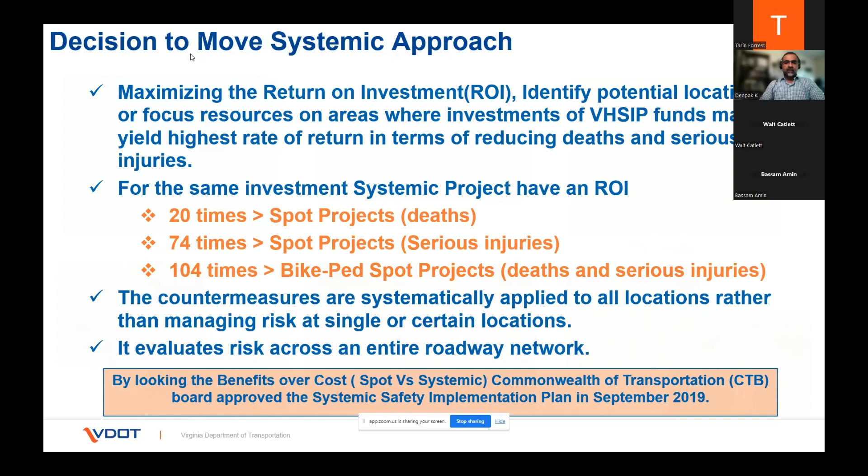The slides talk about local systemic initiative countermeasure identification, how we developed the systemic criteria for this round. The process for identifying systemic initiatives begins with our Strategic Highway Safety Plan, that is the Virginia SHSP.

That is the statewide coordination between safety planners and providers, a comprehensive framework for reducing fatalities and serious injuries on all public roads. The SHSP is developed in coordination with transportation and safety stakeholders and is updated every 5 years. The current plan extends from 2022 to 2026 and includes various emphasis areas to address traffic safety.

The emphasis areas relate to infrastructure-related improvement and behavioral-related focus on safe system elements. The emphasis areas included in the SHSP are roadway departure, speeding, intersection related, pedestrian, bicycle, impaired driving, occupant protection, young drivers, senior drivers, and we also use a data-driven approach.

The second step is after identifying the safe system element and emphasis area, we compile systemic countermeasures to address the emphasis area in the SHSP. Systemic countermeasures are low-cost measures with proven safety benefits that can be implemented at locations with the associated crash type. These were identified using crash modification factors from the clearinghouse, VDOT's Virginia-specific preferred crash modification list, Federal Highway's proven safety countermeasures, Virginia Transportation Research Council studies, NCHRP reports, etc. From there, we conducted a benefit cost analysis to determine which measures would provide the greatest safety benefit for the investment.

Hey Deepak. Yes, okay perfect, you're good. Okay, your slide was looking funky but it looks great now, so I'll be quiet. Keep rocking and rolling. Sorry about that, okay.

After the determination of systemic initiatives, this slide shows the VDOT preferred systemic initiatives. These are the ones we're focused on. But if localities have some initiatives they want to include, they must make the case and prove the selected countermeasures have the highest return on investment. However, priority will be given to these 6 identified initiatives, and ultimately these 6 countermeasures are the ones we have ready to provide funds for localities.

And these are all FHWA proven countermeasures. The implementation criteria and one-pagers have been developed, so those are all available on our external website. Please go and follow the criteria before preparing the application.

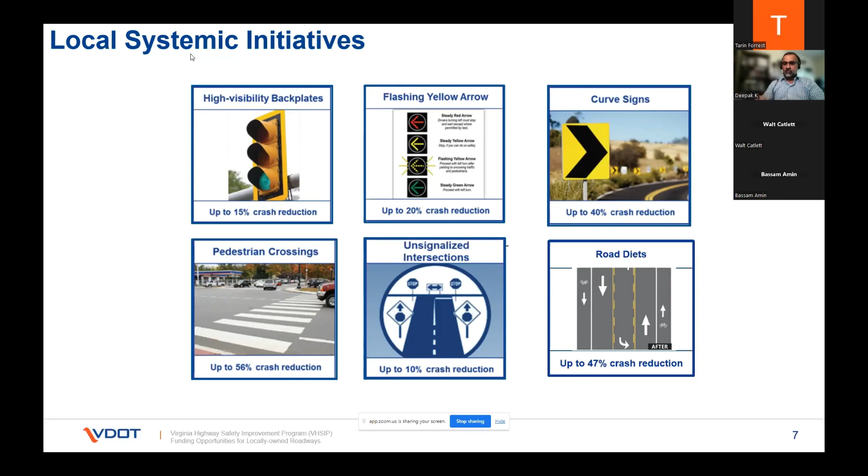These slides talk about the funding availability for localities. The Commonwealth Transportation Board approved the updated systemic plan in January 2022 and set aside approximately 110 million for localities. Last round, we funded all the local safety projects submitted, worth around 60 million on locally maintained roads. The leftover fund, approximately 50 million, is available for this round, and it's focused on the 6 identified initiatives: high visibility backplates, flashing yellow arrow, pedestrian crossing, road diet, unsignalized intersection, and curve delineation.

The one-pagers and implementation criteria have been developed, so please go to the external VDOT website to look at those before preparing applications.

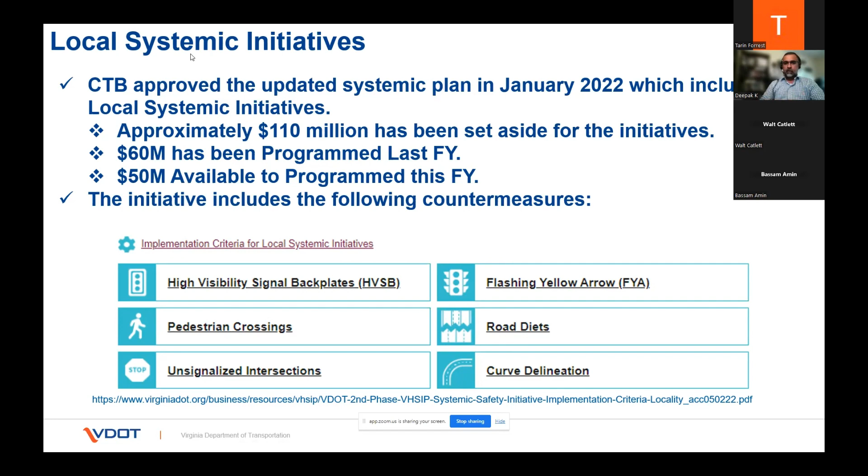For this round, the funding is only available for systemic initiatives on locally maintained roads. Let me tell you a fact about Virginia: VDOT ranked 3rd in the country for state maintained highway miles after Texas and North Carolina. That's roughly 58,000 centerline miles VDOT maintains, and roughly 11,000 centerline miles of urban streets maintained by cities and towns. Just to remind you, the funding is only available for locally maintained roads for this round.

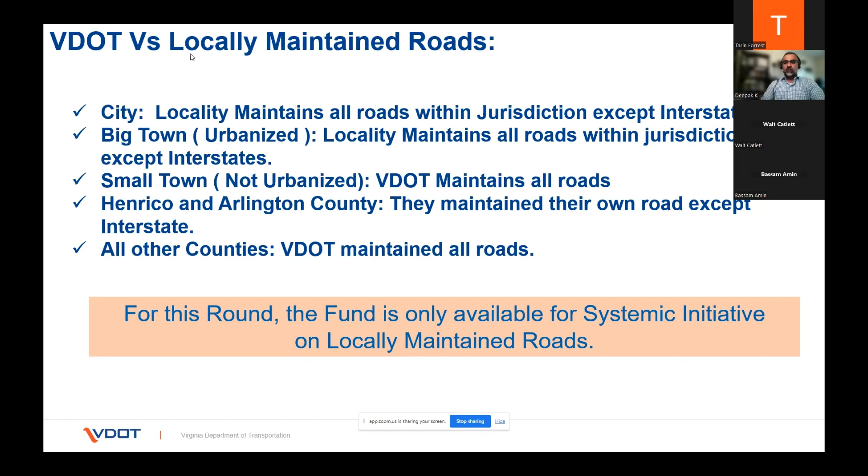I'm not going to spend a lot of time on these initiatives, I'll just go through them in summary. High visibility backplates is one of the countermeasures proven as a low-cost safety countermeasure by Federal Highway that can be deployed systematically. The budget estimate is 5,000 to 15,000 per intersection. The service life, meaning the physical life of the high visibility backplates, is around 6 years. VDOT has developed tools to calculate service life, which we'll share in the near future through roundtables or similar to show how to calculate service lives for each initiative.

Basically, all traffic signals are eligible to get the HVSB with some restrictions, which include pole upgrades, signal structure replacement, or major signal modifications being restricted for this round. The HVSB has a high crash reduction, up to 15%, which is about 0.85. So after implementing HVSB, you're expected to reduce crashes by 15%.

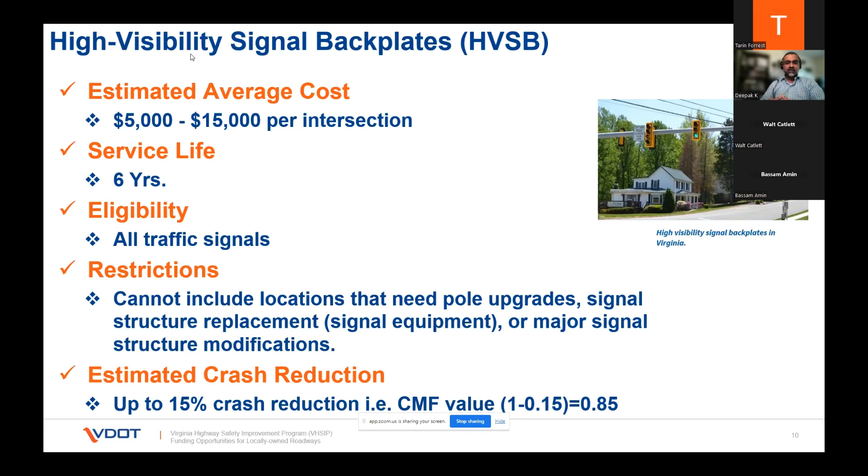Similarly, the flashing yellow arrow is another proven safety countermeasure by Federal Highway. The budget estimate is 50,000 to 125,000 per intersection, and the service life is around 10 years.

Not all traffic signals are eligible to get the flashing yellow arrow. Eligible flashing yellow arrow installation includes retrofit of existing permissive left turn phasing or protected permissive left turn phasing only. The restriction applied here is if we have major signal structure modification, such as full signal rebuild, we are not expecting those kinds of improvements for flashing yellow arrow.

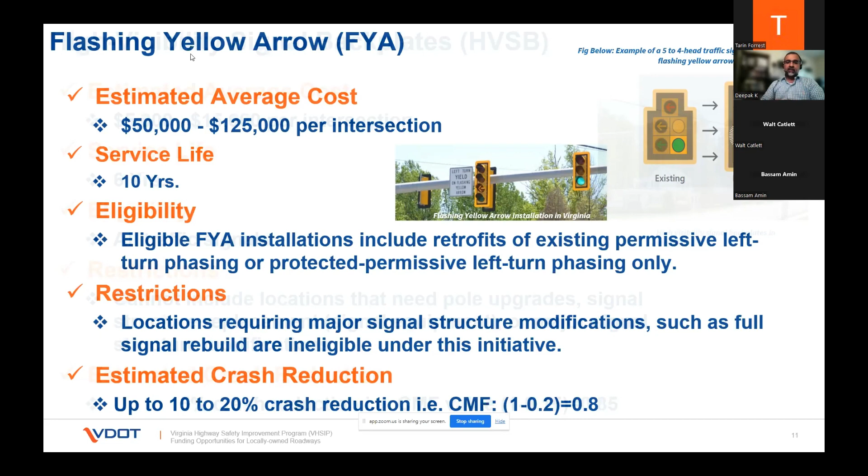The estimated crash reduction is 10 to 20%. So after implementing flashing yellow arrow, we are expected to reduce 20% of the crash.

Similarly, the pedestrian crossing is another low-cost proven safety countermeasure by Federal Highway that can be deployed systematically. The budget estimate is 50,000 to 125,000 per crossing location. The service life is around 5 years, and it includes a variety of low-cost treatments for signalized, unsignalized, and mid-block locations. We are not expecting from localities extensive sidewalk connections, road widenings, utilities relocations, curb gutter improvements. Those kinds of costs are restricted. The estimated crash reduction is 56%, so after implementing the high visibility crosswalk, we are expecting to reduce 56% of crash.

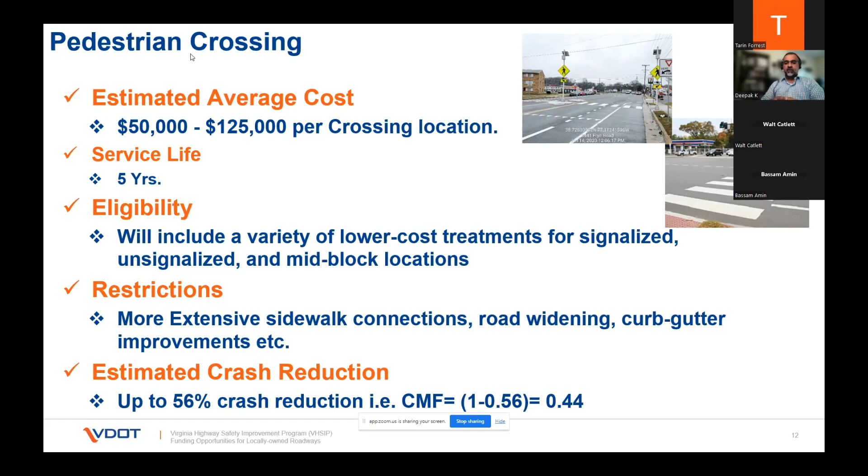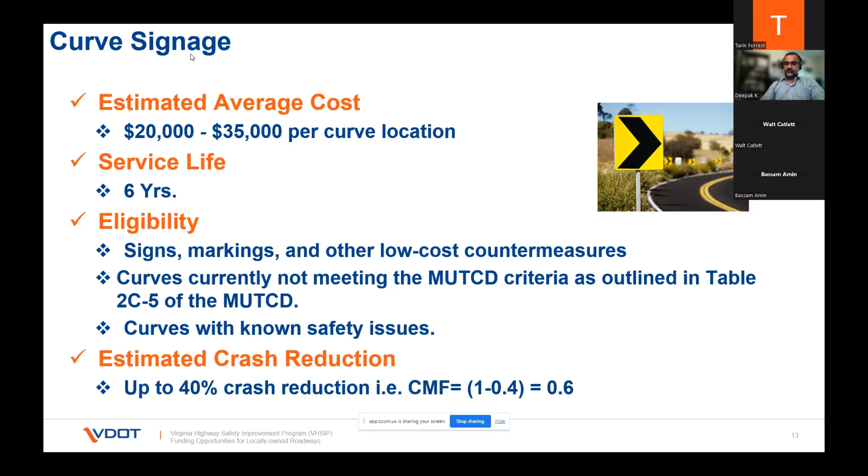Similarly, the unsignalized intersections is another low-cost proven safety countermeasure by Federal Highway. The budget estimated on average is 6,000 to 37,000 per location. The service life is around 5 years. The eligible criteria is signs, markings, and other low-cost countermeasures. Basically, the VTRC has published a report on unsignalized intersections with tier 1, tier 2, tier 3. If you are interested, you can go there. Those are all qualified low-cost countermeasures, and all those items are eligible for the unsignalized intersections. The estimated crash reduction is 10%, so after implementing unsignalized intersection related countermeasures, we are expecting to reduce around 10% of crash.

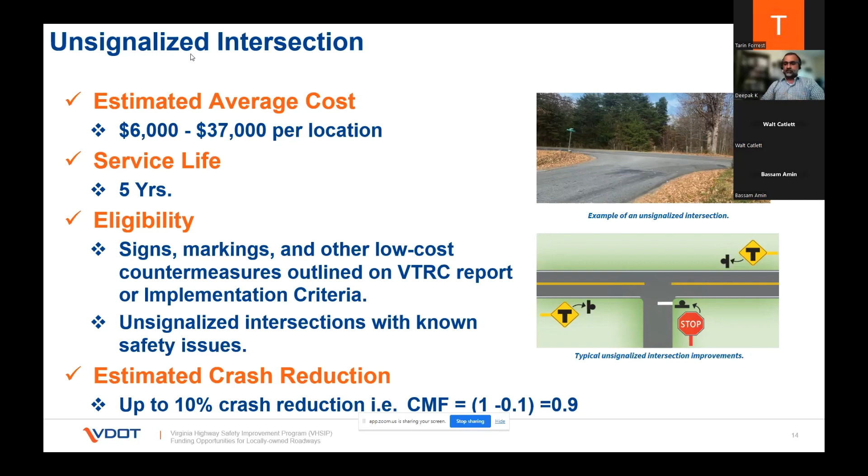The other one is road reconfiguration, or we can call it road diet. This is also a proven safety countermeasure by Federal Highway that can be deployed systematically. The road diet typically involves converting an existing 4-lane undivided roadway to a 3-lane roadway consisting of 2 through lanes and a center two-way left turn lane. Typically, for roadway with ADT less than 20,000, we recommend that. The budget estimated is around 50,000 to 100,000 per mile. The service life is around 6 years.

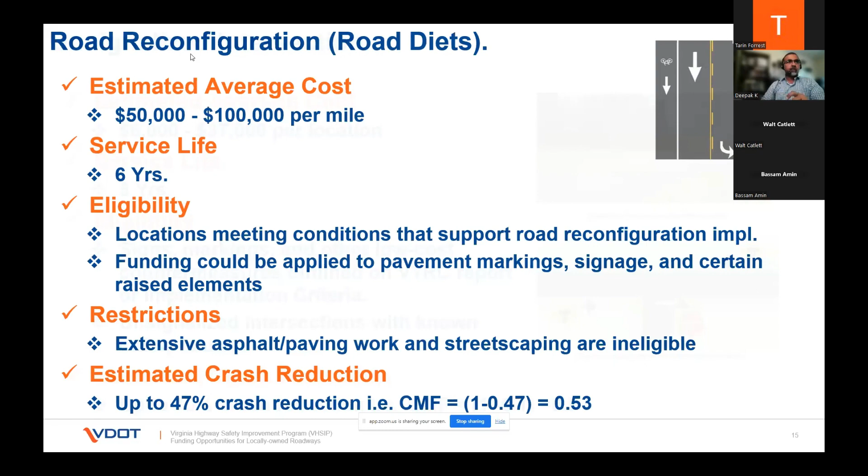We recommend to reduce the low cost. We recommend localities to follow the paving schedule and to reconfigure, to apply the road reconfiguration, so that you will save a lot of money when you are doing it with the 3R or paving schedule planned. The extensive asphalt paving work and streetscaping and adding additional lanes are not eligible for road diet. The estimated crash reduction is around 47% after implementing the road diet.

Technical assistance is available through VDOT Central Office Traffic Operation Division. However, the assistance for this period has been closed. Localities seeking assistance with this year's applications process will be contacted by the safety circuit rider team or one of our on-call consultants, BSP, Kimley-Horn, or WSP, to determine the level of support and help prepare the applications and engineering support. The engineering technical assistance includes countermeasures and site identification, application development, high-level cost estimate development, and developing scope for funding applications. Assistance not offered is the detailed design and administering the projects. So if you have any questions on this, you can contact any of us at HSIP program at vdot.virginia.gov, and we'll be reaching back to you all.

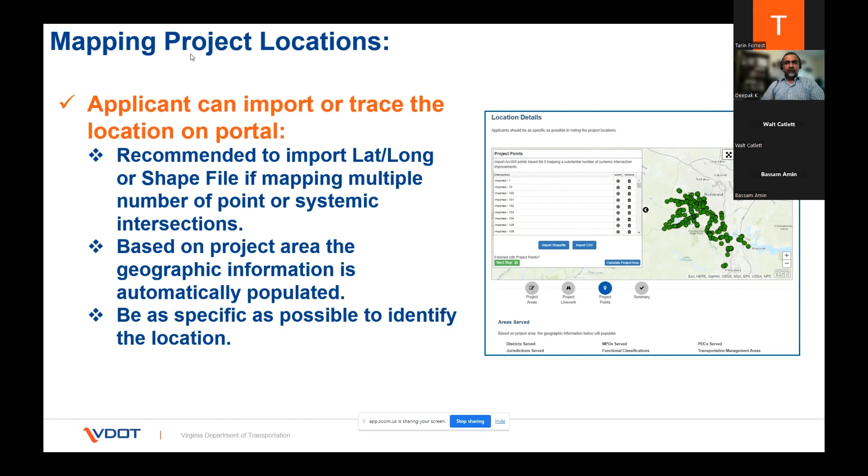The location factor, as I showed you previously, if localities map the locations properly, we'll give them the full score.

If applications use the VDOT identified scope, like the six systemic initiative, we will give them the full score because localities do not need to enter the crash modification factors or service life. Those are all embedded in the portal, so it's very easy to follow, if district localities decide to pick the VDOT identified countermeasures.

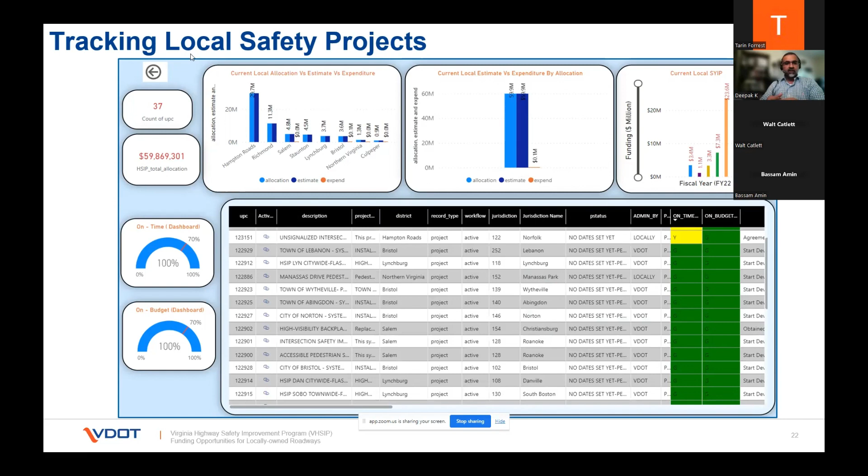This concludes my part of the sections. We have an external website with all the implementation criteria, webinars, and everything there, so we recommend you go to the external VDOT website and check those out. We also have an email sign-up. We offer periodic trainings, guidance, and updates, so if you sign up on the VDOT external website, you'll get all those notifications.

So if you have any questions, our VHSIP program manager Tracy Turpin, or you can contact me. We are here to help.

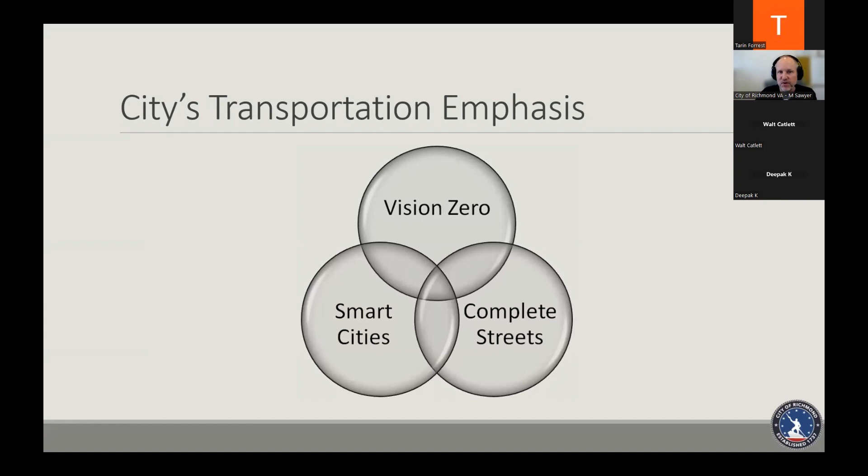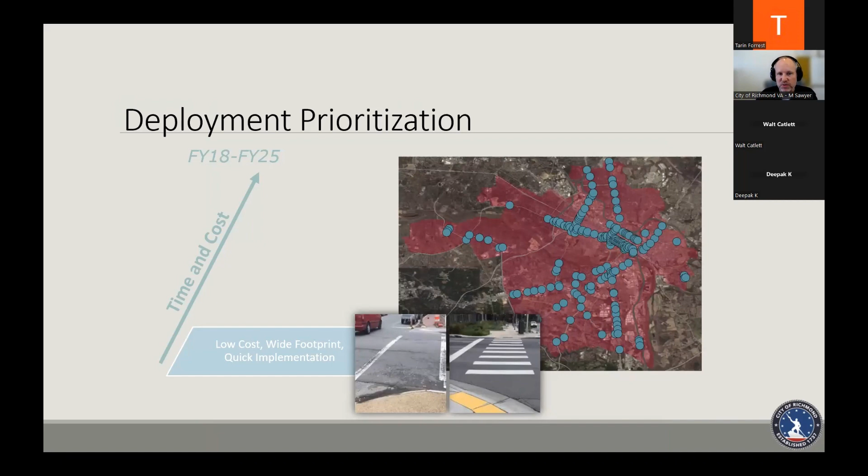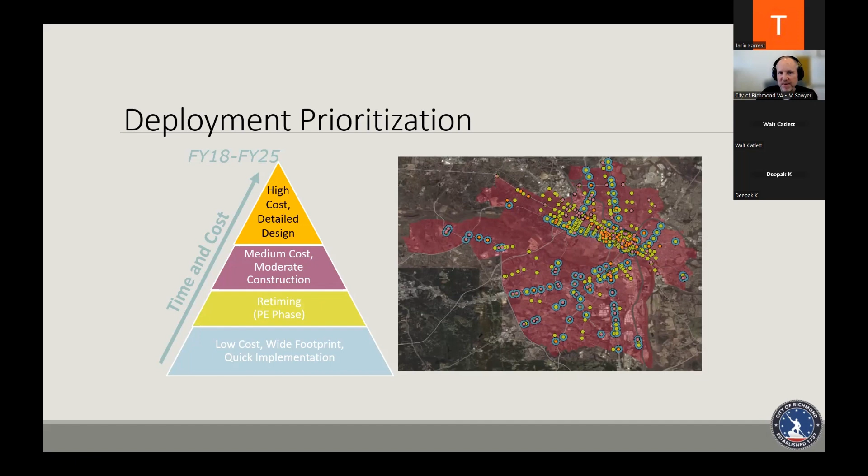When you think about prioritization, you want to go the systemic approach, which is low cost, wide footprint, quick implementation. Then you go and maybe have some retiming funding that you can throw in there to help all modes get across the street, particularly people walking. Then you have medium cost, moderate construction, and then high cost. So when deploying things in your communities, think about what can be done quickly, which is usually the systemic approach.

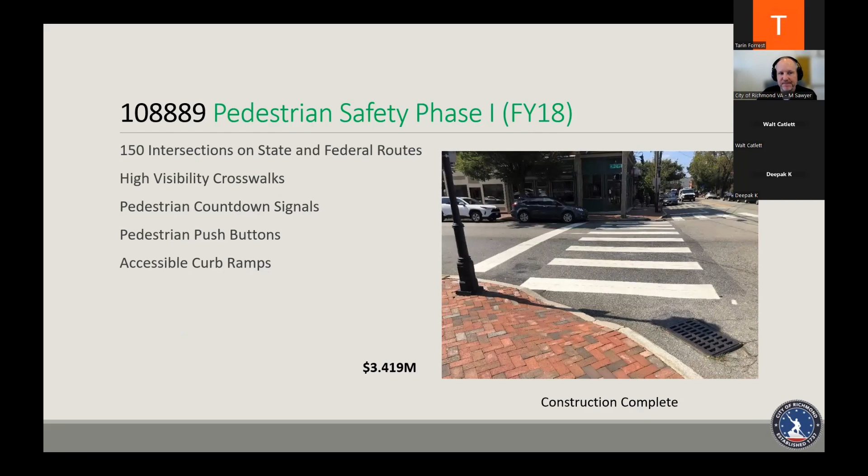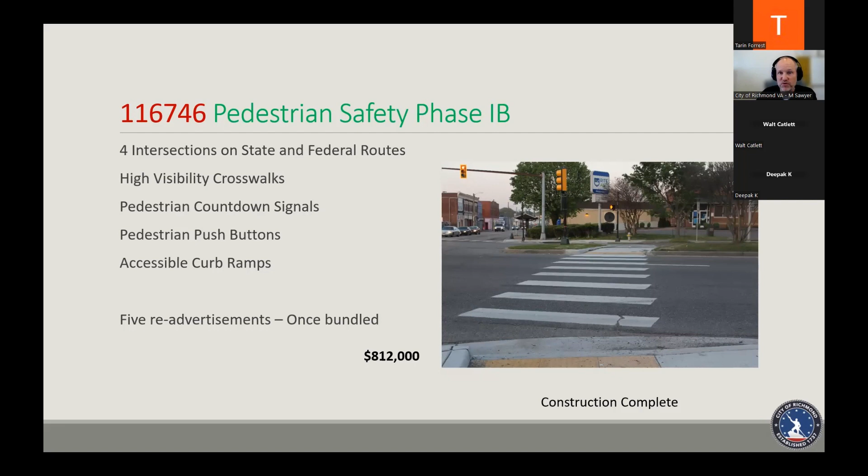We also had a follow-on project, which we called 1B. It only addressed 4 intersections, doing much of the same thing. One thing I'll note is when it's lower cost like this, you may have trouble advertising and getting a contractor on board because the dollar value isn't as high as they're looking for. We had 5 re-advertisements with this one, but the construction is complete now, and those are the 4 locations with that project.

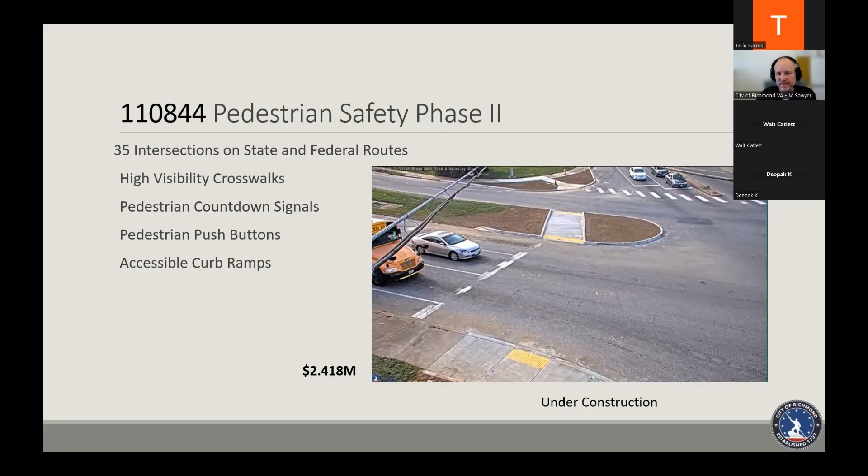Then we have Phase 2, which is currently underway. It's addressing 35 intersections, doing the same type of work, $2.4 million. Those are the locations we're addressing with that.

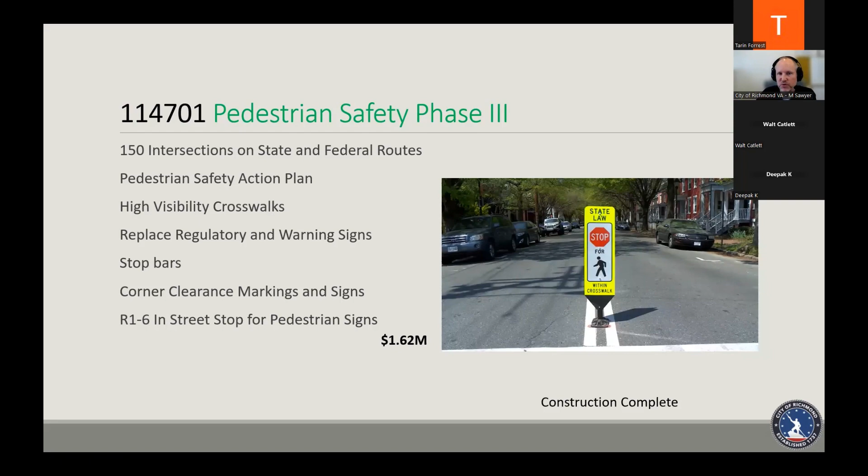We had Phase 3, which addressed 150 intersections again, but this time they were unsignalized, uncontrolled intersections. We did crosswalks, regulatory and warning signs, stop bars, corner clearance marks, and the R1-6 in-street sign for stop for pedestrians. This coincided with the new state law, which was stop for pedestrians, so we've been trying to advertise that on the street as well to get a cultural shift and change there. That was another $1.6 million. There are those locations.

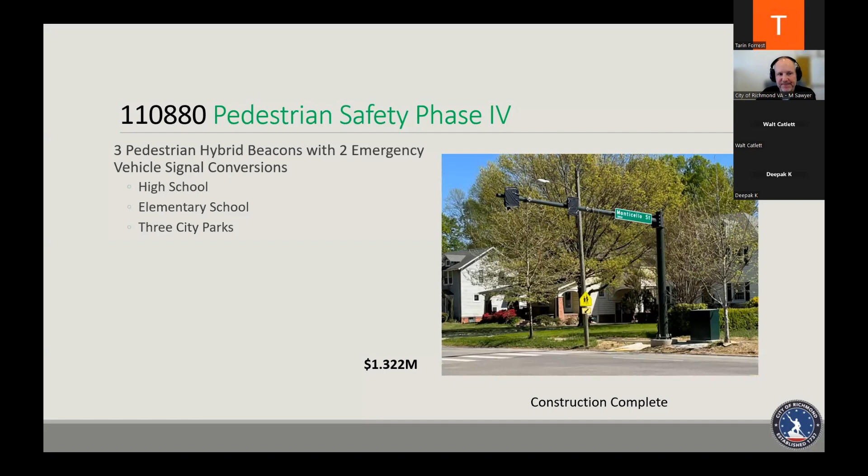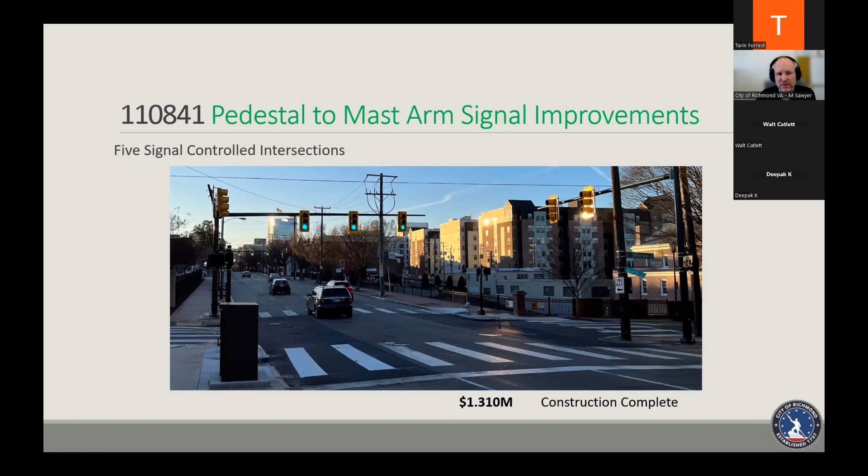Then we had converting—historically in the city of Richmond, we had a lot of pedestal mounted signal indications on the side of the roadways, and we want to get them up overhead. There's a huge safety benefit when you do that, and we still have a few of these remaining. Most of them were done around the turn of the century, but we were able to convert 5 more intersections for $1.3 million using safety funds. There's those locations in the city.

And then we're building new traffic control signals as well. This is $2.1 million, and we're addressing 3 intersections.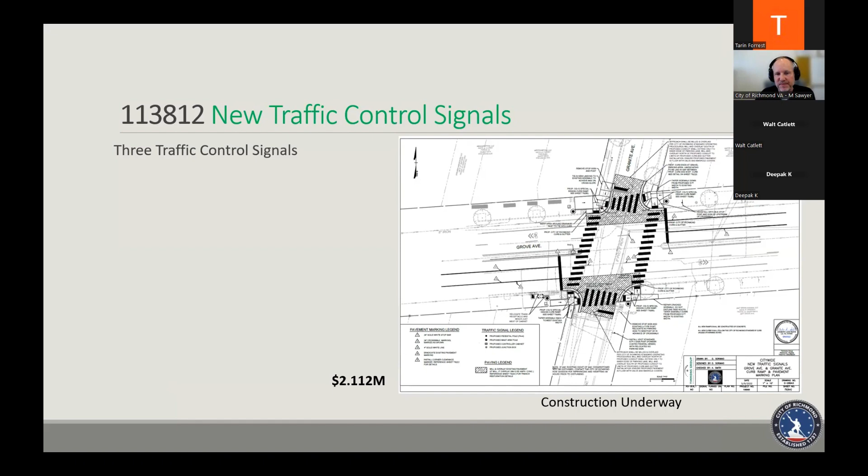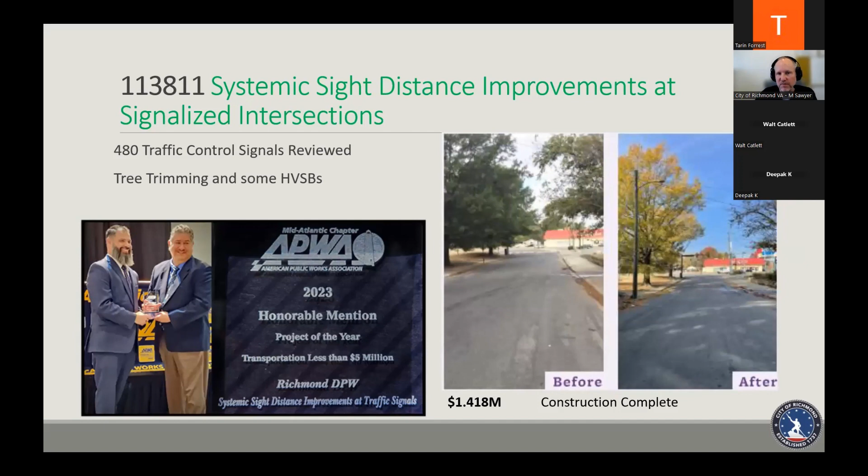We won a nice award for systemic sight distance improvements at signalized intersections. You can see by the pictures, you can't necessarily see from the required distance the signal indication. So we went around to all 480 intersections and did an evaluation, then did tree trimming and also used some high visibility signal backplates. APWA gave us an honorable mention for project of the year for less than $5 million. That was a $1.4 million project.

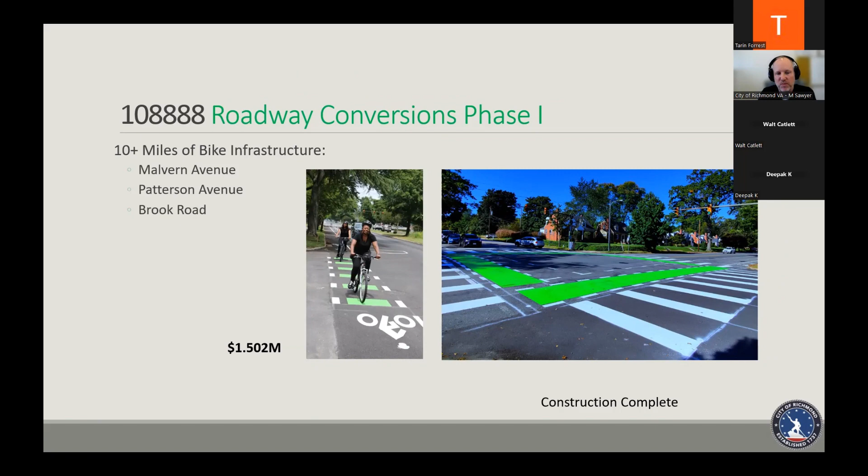We also did roadway conversion. We have 10+ miles of bike infrastructure because of the Highway Safety Improvement Program. That was $1.5 million. Those are those locations in the city.

And then we were able to go around some elementary schools. This is Mary Munford, for about $500,000. We upgraded the school flashers, school pavement markings, raised crosswalk, and high visibility crosswalks. One note here—again, it was a low value project and it was difficult to get a contractor on board using federal dollars to do that, but we were able to get it complete.

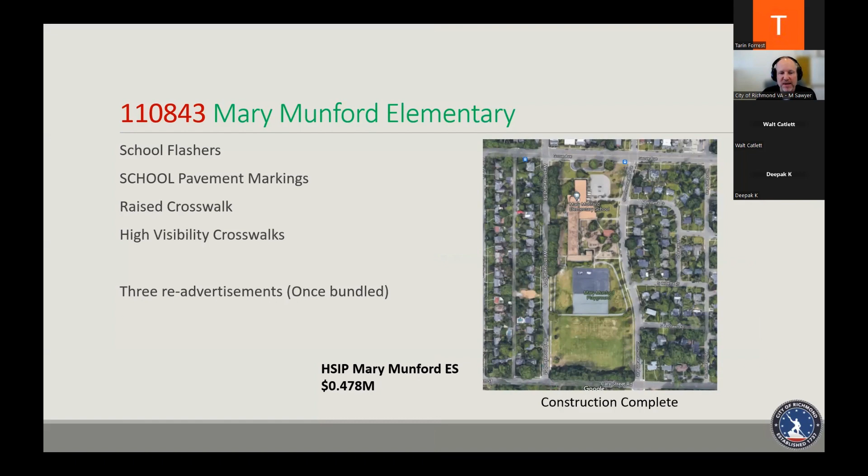Then Oak Grove Elementary on our south side, we had curb extensions, crosswalks, school warning signs, sidewalk, and curb ramps. Again, that was a low value project so we had trouble with the contractor, but this is complete.

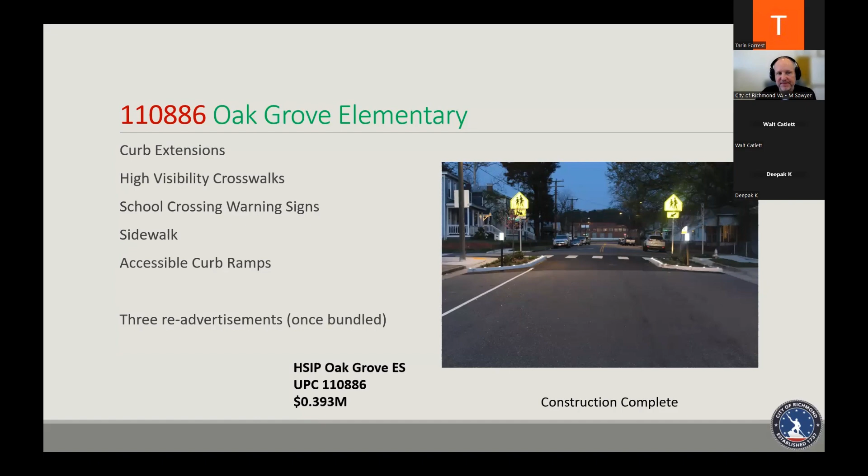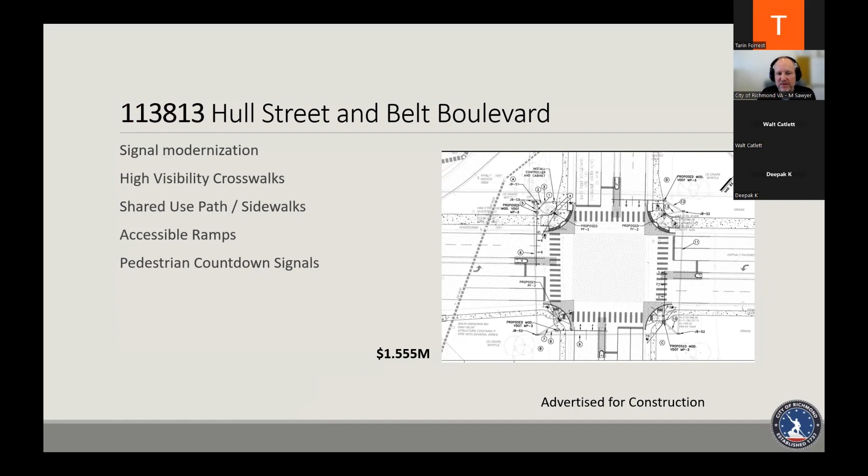Now we're moving on to one that's advertised for construction. This is an improvement at Hull Street and Belt Boulevard, where we have our transit transfer center on the south side. It's a signal modernization with high visibility crosswalks, a shared use path, sidewalks, accessible ramps, and countdown signal. That's $1.5 million worth of improvement.

This one's just kicking off in design. This is Hopkins Road, on the south side. It's a $1.5 million roadway conversion. It's currently a 5-lane section that will be converted to a 3-lane section with buffered bike lanes, and I think that ends up being about another 6 miles of bike infrastructure.

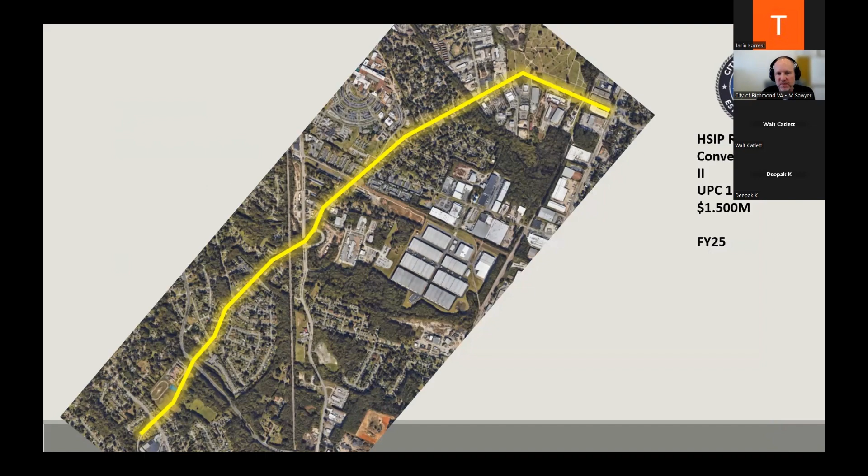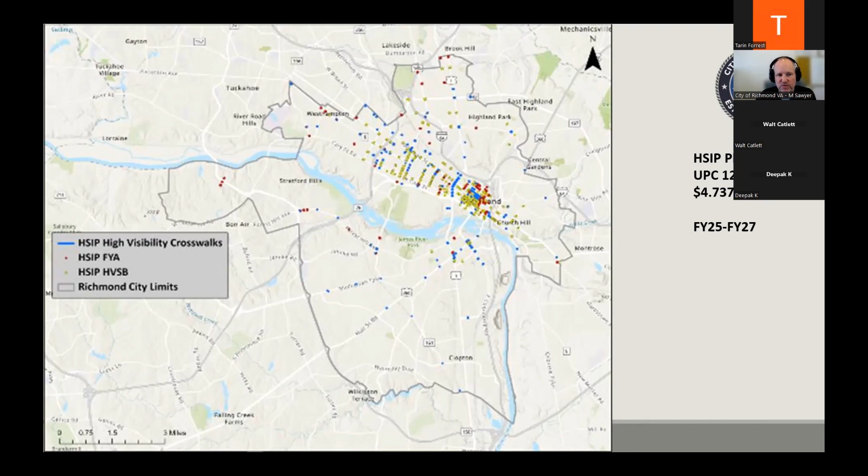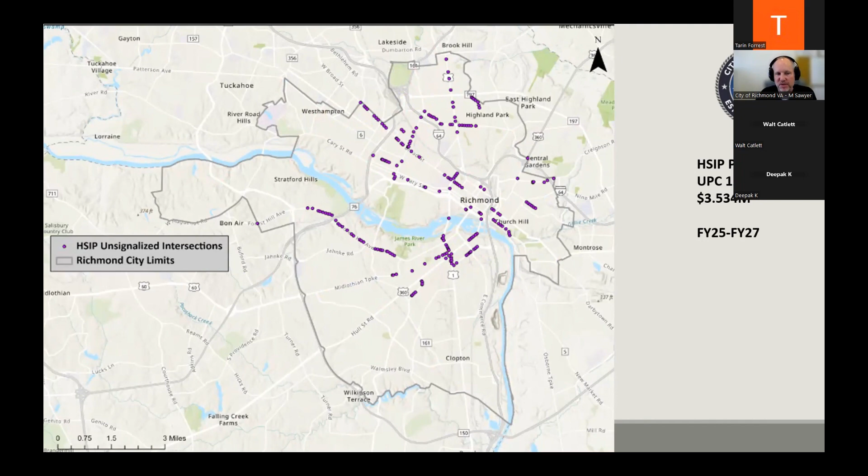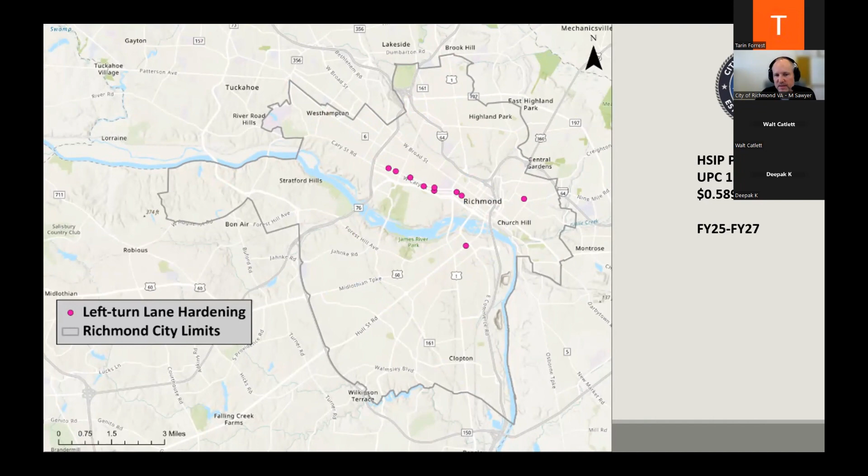This is at unsignalized intersections. It's $3.5 million to improve the markings and signage on these corridors. And then lastly, we're deploying some left turn hardening measures for $589,000. Again, these last three are upcoming. So you can see it's quite a lot of work that we're able to accomplish with this partnership we have with the Federal Highway Administration and VDOT to make a difference with low cost systemic improvements.

So I encourage you to continue to pursue this type of funding. You can even take it away from us in the competition, right? So encourage that. All right, that's all I had, Walt.

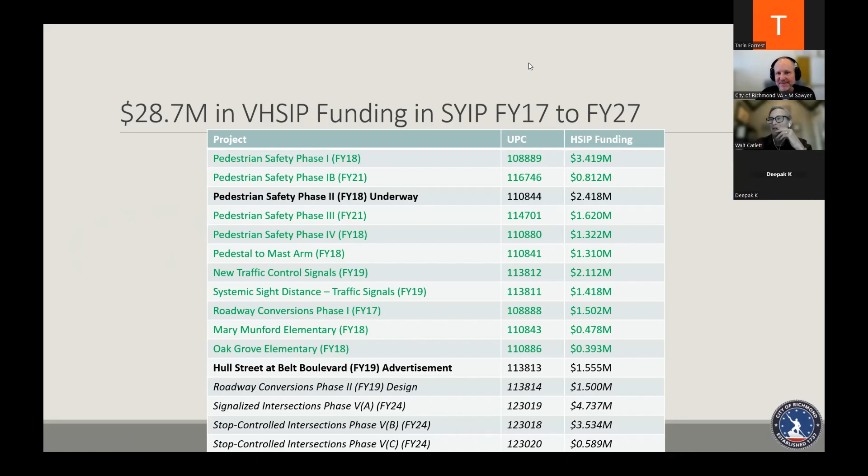Hey Mike, thanks for sharing City of Richmond's programs. I just had one question, and that is, a lot of times when we travel out around the state and interact with localities, city traffic engineers and people who do this type of work, they're just starting. Anything you want to add, since you have a robust program? Any words of encouragement for that type of situation?

Yeah, definitely. You need to start where you are and just identify your high injury network and go to work with the tools that VDOT's allowing us to deploy. And don't be afraid to be innovative in your application, but just start where it's the worst, and you're going to make a difference.

When you do these things, you also want to leverage your partnerships. You want to say you're changing the built environment, but we're not just changing the built environment, we're doing it to shift our safety culture. So I always say, if I put a crosswalk down and no one stops for the person in the crosswalk, what good is it? So the culture has to come along with the built environment.

So HSIP is a great program to allow you to build credibility within your jurisdiction, to say we're doing things. Now, if the police department could do their part, and if the educators could do their part, and if the health professionals could do their part, engineering can do its part.

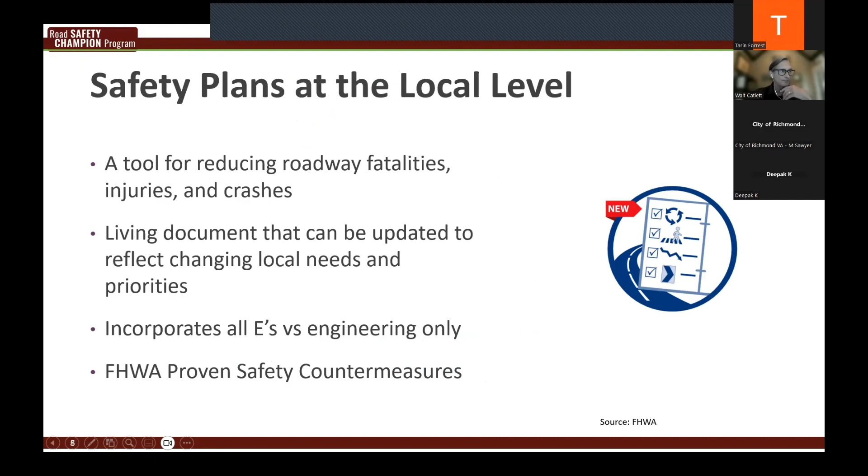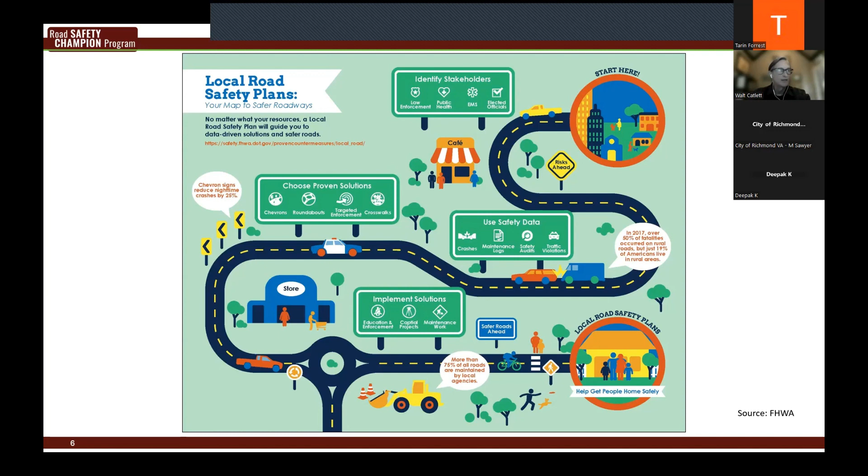Here's a neat little graphic on local road safety plans that FHWA puts out. If you haven't visited their website, please do it. It has a ton of helpful information.

For crash data analysis, we'll sit down with a local agency, the traffic engineer, city engineer, planner, administrator, whoever has that responsibility, and walk them through these items: VDOT's crash analysis tool, the pedestrian safety action plan, potential safety improvements, and we'll highlight the Virginia Highway Safety Improvement Plan and the locality systemic initiatives, which Deepak has already covered for us.

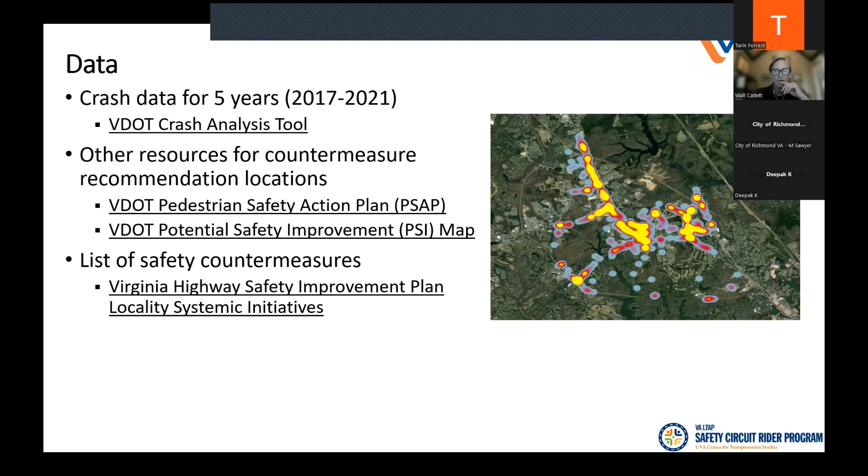If you haven't visited VDOT's crash tool, you need to certainly do it. If you don't know how to, reach out to me and I'll point you in the right direction.

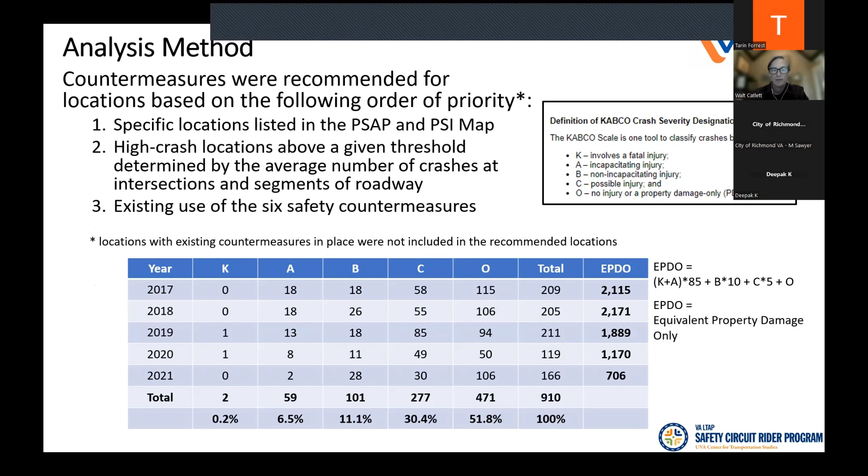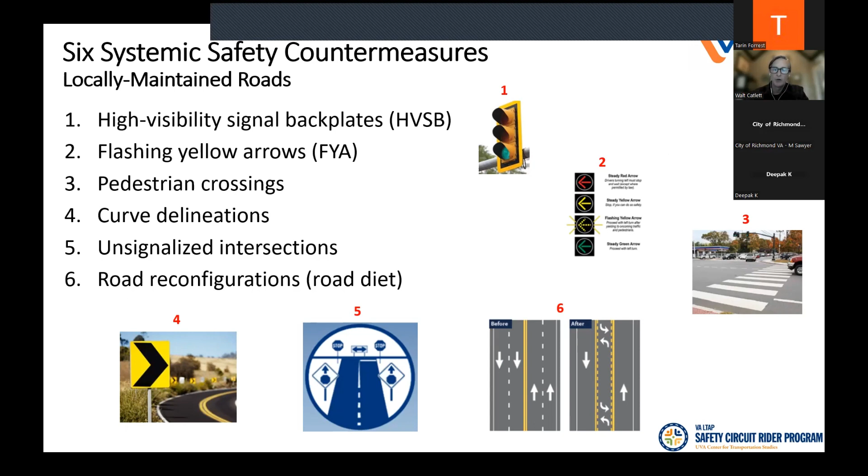We'll do that for your town as well. Then we focus primarily on these 6 systemic safety countermeasures, which Deepak touched on as well. The name of the game is a systemic approach using low-cost countermeasures to move the needle and get us closer to zero deaths on our roadways.

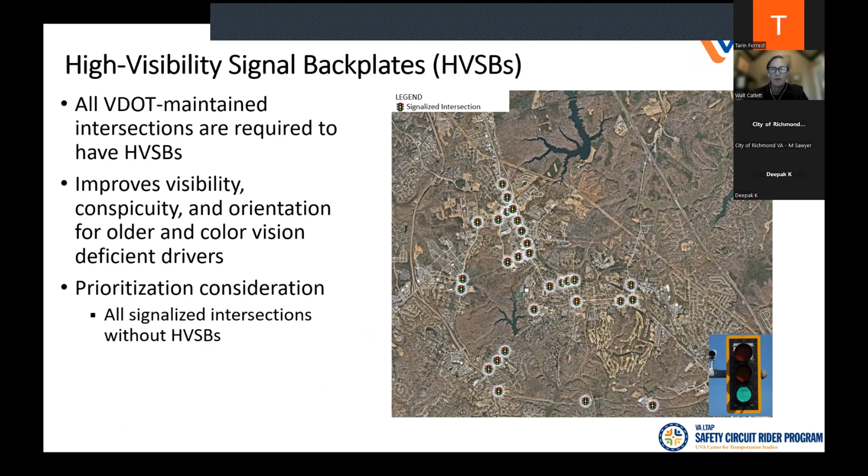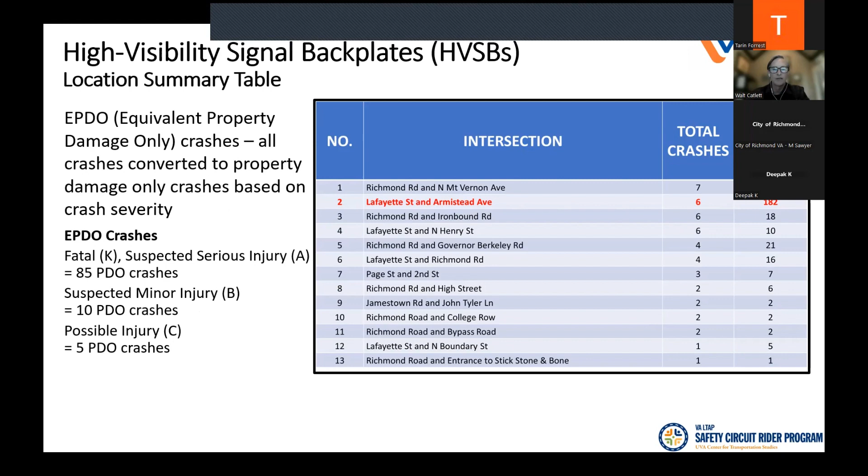This is another view where we identify the different signalized intersections within this town, promoting things like high visibility signal backplates, which is one of the measures you can request with this round of systemic safety funding. We'll break it down for your town or city and highlight the intersections that catch our attention.

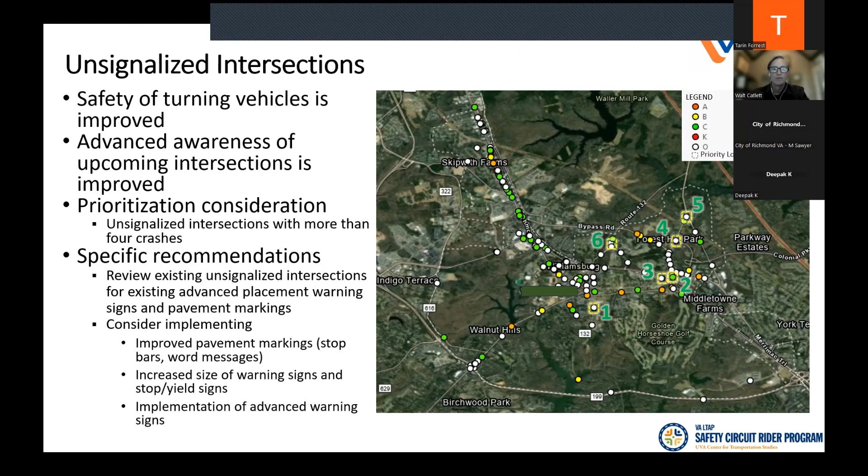Unsignalized intersections as well, we touch on that. You can see where the different crashes occurred for that situation, and then we drill down a bit more and point out the different intersections that had crashes.

We conduct road safety audits as well, and you can see the definition for a road safety audit. We call them road safety assessments within VDOT: a formal safety performance evaluation of an existing road or intersection by an independent multidisciplinary team.

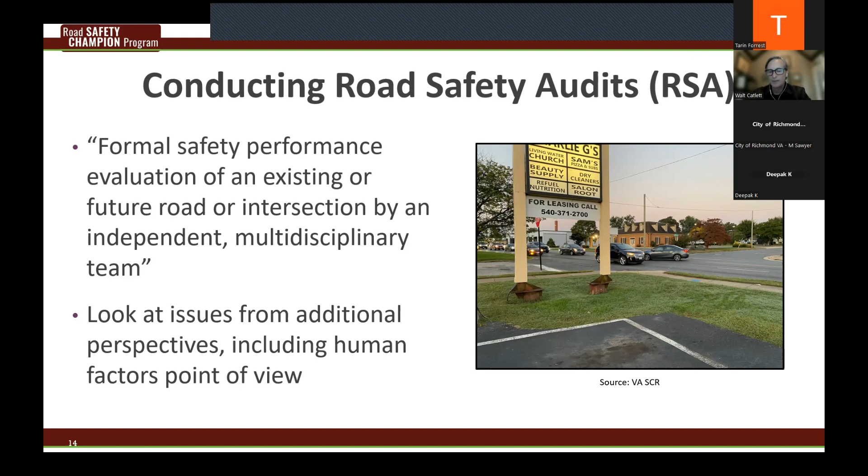So give us a call, we'd be more than happy to work with you. We did an RSA for the town of Chincoteague, focusing on short-term, intermediate, and long-term improvements, and a handful of other things within that road safety assessment.

We talk about safety in our Road Safety Champion program. We focus on the safe system approach, and we promote both VDOT and FHWA initiatives that are out there.

All right, I'm going to try to share this screen. I'm going to unshare and share another screen. Probably could just pull that screen over, that would be smart, but I'm not that intelligent. All right, let's see here. This, and then I'll stop. Hopefully you can hear this. Taryn, tell me if you can. Coming through loud and clear.

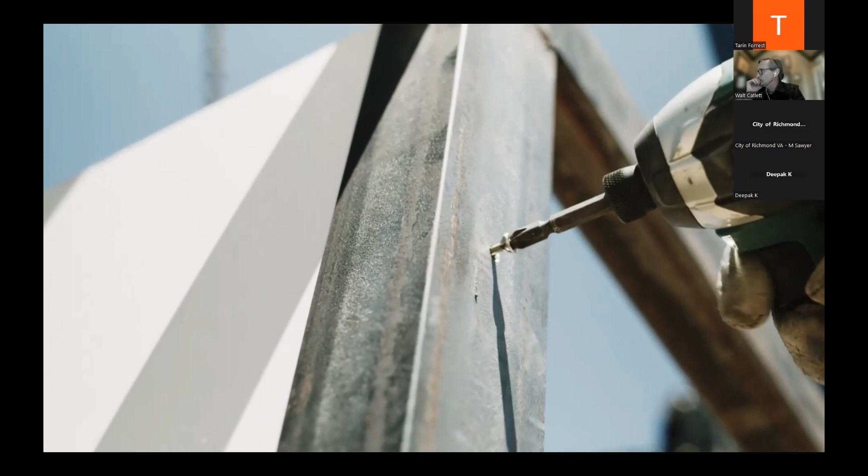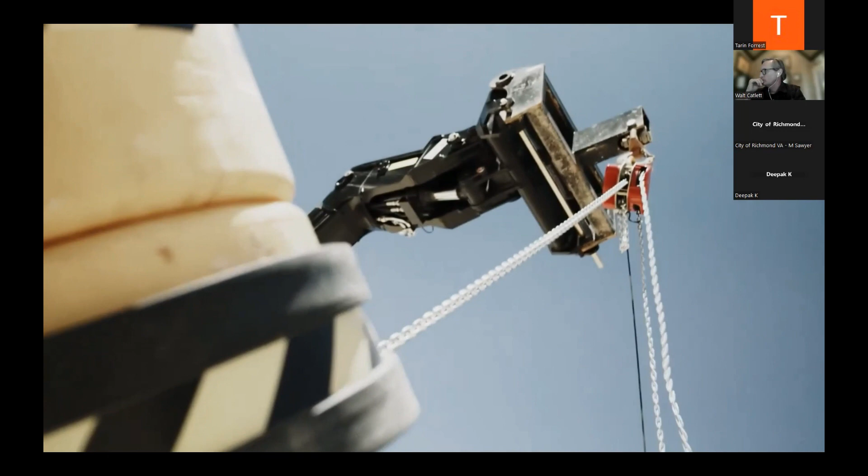The human body isn't designed to handle the force of a motor vehicle crash. So if we're to achieve zero deaths or serious injuries, the responsibility for safety on our roads falls on all of us. We call this approach the Safe System: multiple layers working together to protect you. That's the vehicle you're in, how safe you drive, the roads and safety conditions provided for you, and the speed you travel. So should something go wrong while traveling along our road network, the layers of the system are there to lessen the severity of a crash.

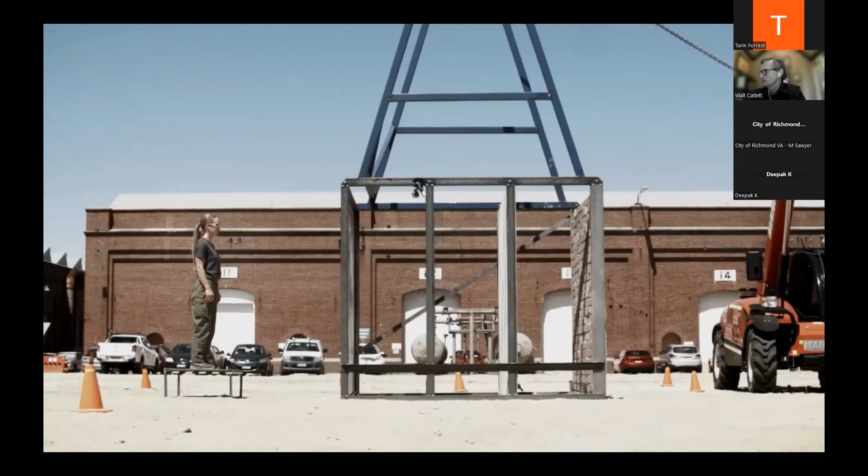It's true that mistakes on the road can be costly, but with a safe system in place, those mistakes shouldn't cost us our lives.